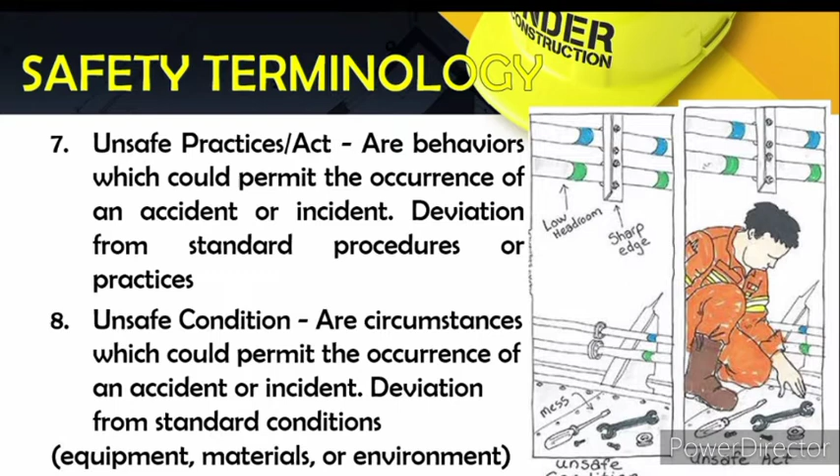So this picture shows the different terms. The rusty lifting gear is the unsafe condition, an example of faulty equipment. And the two workers with no PPE and very inattentive to their environment represent the unsafe acts.

So in the third box we can see a near miss, which is the two of them almost being harmed - there is no harm done to them. And the last box is what we consider an accident because it is fatal, not just an injury. So both near miss and accidents are called incidents.

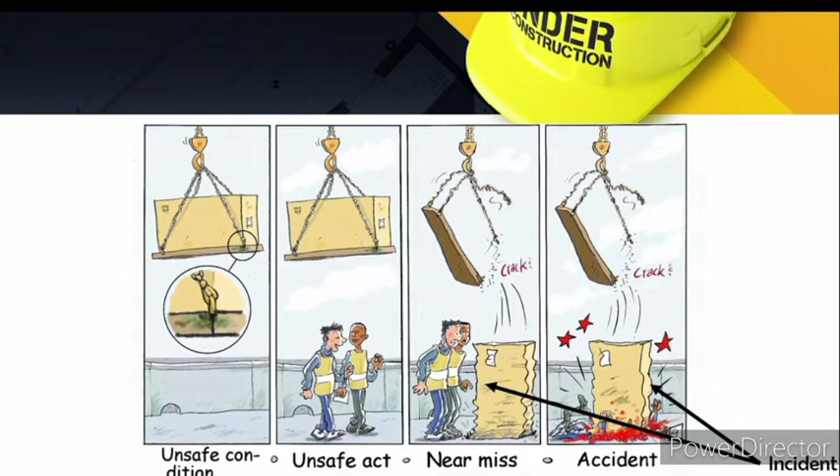Number 9 is safety programs. These are activities designed to assist management and employees in the recognition, evaluation, and control of workplace hazards. The main goal of safety and health programs is to prevent work-related injuries, illnesses, and deaths.

This is a very important aspect in the workplace. Safety programs are activities that help employers and employees control workplace hazards. This may include training on how to identify and control hazards, conducting inspections, or implementing a reporting system - all to maintain safety in the workplace.

Number 10 is the safety audit. A safety audit is a critical examination of a safety and health management program to determine its effectiveness and compliance to regulatory standards. Safety audits are carried out to assess health and safety processes on construction sites.

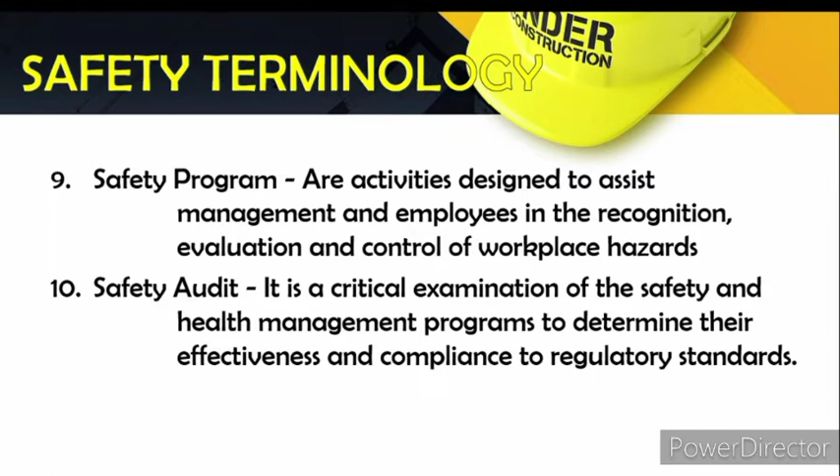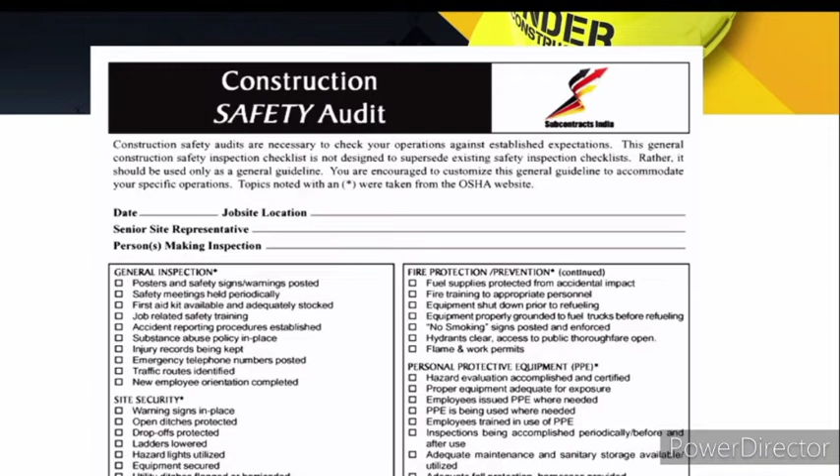This picture is an example of a construction safety audit. As you can see, there is general inspection, site security, PPE, fire protection and prevention, and many more categories that follow. These are used to check and assess different aspects of a workplace to ensure safety.

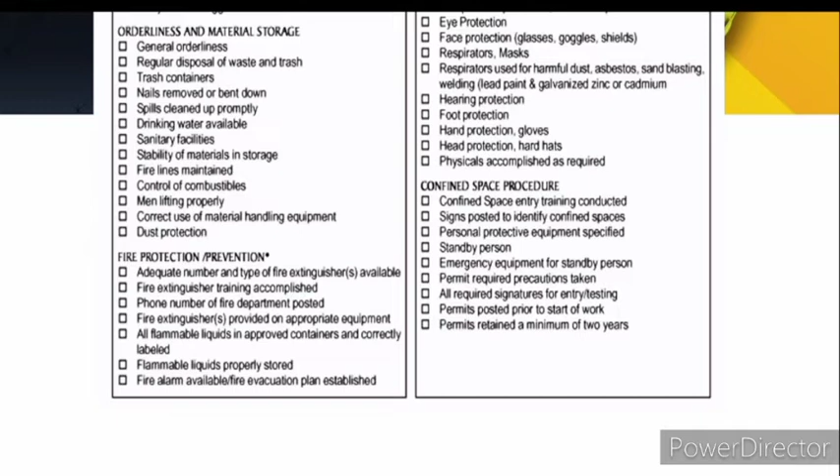The last one is personal protective equipment, or PPE. These are devices used to protect an employee from injury or illness resulting from contact with chemical, radiological, physical, electrical, mechanical, or other workplace hazards.

First is the hard hat - never enter a site without this. This protects the head from any danger, from bumps to the head, sharp edges, objects falling from above, or accidental contact with electrical hazards.

So, construction sites are prone to noise hazards. That's why we need to wear ear muffs. Ear muffs and earplugs are common hearing protection tools. Ear muffs are used for reducing high-frequency noise, while earplugs are effective in reducing low-frequency noise.

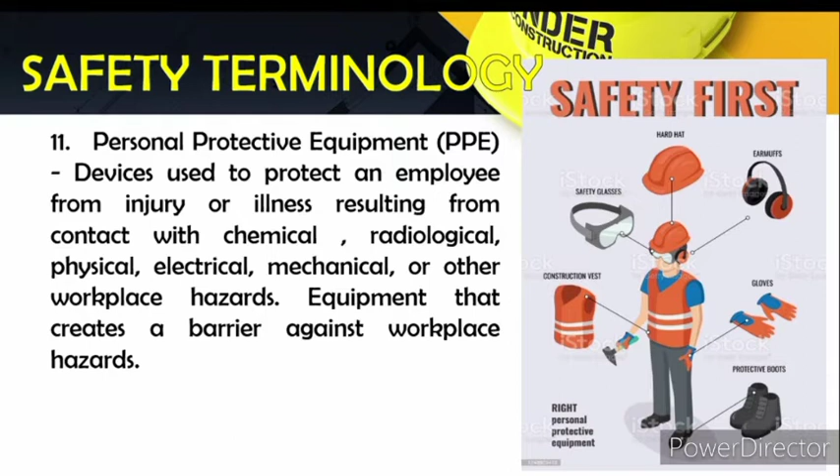Last one is the construction vest. So why do we need to wear a vest? One importance of the vest is for easy detection, which can help other parties avoid colliding with the individual because it promotes visibility. So there are many more PPE and it will be discussed later on.

So let's move on to the facts and figures from OSH in the construction industry. OSH stands for Occupational Safety and Health. So these are the facts and figures from OSH.

17% of the surveyed companies have experienced death in their present workplace. 71% of the workplace do not have a first aid station. 21% of the surveyed companies reported major injuries. 72% of the workplace do not have trained first aid personnel. 17% of the surveyed companies accounted disability. 42% have minor injuries occurring in the surveyed job sites.

10% use their safety belts. 6 out of 10 claim that personal protective equipments were not issued to them, and 2 out of 10 used lifelines.

So what does this figure tell us? It only means that some of the health and safety policies are not properly implemented. Some of the management are lacking and irresponsible to their employees. It is alarming that many construction sites are unsafe and hazardous for their workers. Some safety and health policies should be strictly evaluated and implemented accordingly for a safer workplace.

Working surfaces, machinery, trenching, and scaffolding are constantly moving, being assembled and modified, and new hazards are continually emerging. So kapag dito sa safety problem, makikita natin na sa scaffolding, once na inassemble natin siya, halimbawa hindi na siya kailangan sa first floor, sa third floor naman natin siya i-assemble kasi doon na yung kailangan ng workers natin magtrabaho. Kapag nagkamali tayo ng assemble dito, doon na magsisimula yung another risk para sa ating mga workers. Baka may matapakan sila na hindi maganda ang pagkaka-assemble sa part na yun ng scaffolding, or may mga tornilyo pala na nawala nung inassemble na natin yung scaffolding. Doon mag-emerge yung safety problem.

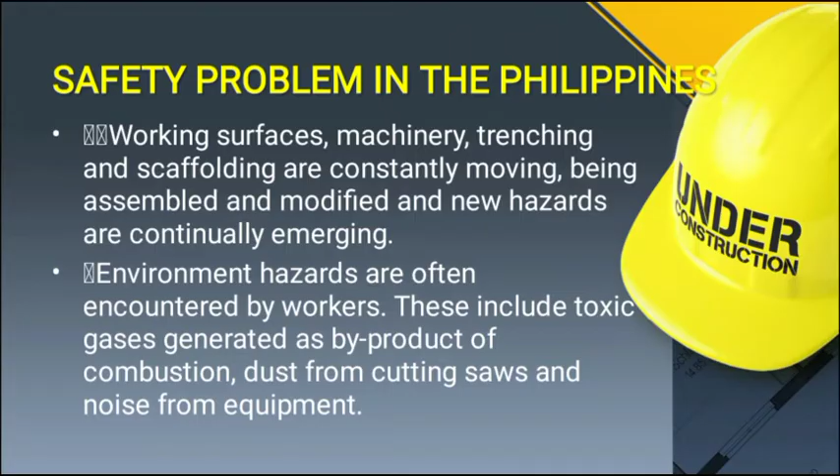The last safety problem is the environmental hazards often encountered by workers. These include toxic gases generated as byproduct of combustion, dust from cutting saws, and noise from equipment. Kaya siya isa sa safety problem na kinakaharap ng ating mga workers, kasi halimbawa sa factory, minsan nadidistract sila ng mga machinery na nasa kanilang paligid. Minsan naman, nalalanghap nila yung mga toxic gases na mula din doon sa mga machine na kanilang ginagamit. Ang tendency is maaari itong makaapekto sa kanilang health, at isa pa, maaring makaapekto rin ito sa kanilang production pagdating doon sa factory na kanilang pinagtatrabahuhan.

Before discussing the predominant items in construction, let us first define the word predominant. When we say predominant, it is being the most noticeable or largest in number. So sa construction industry, ito yung masasabi natin na most common na makikita natin during the construction process.

Unang-unang predominant item natin is the ladder, or yung hagdan. Ano nga ba ang purpose ng hagdan? Ang purpose ng hagdan ay kagaya lang nung purpose kapag nandun tayo sa ating bahay at may ginagamit tayong hagdan para mag-abot ng mga bagay na hindi natin kayang abutin ng kamay lamang natin, o kailangan pa nating umakyat doon sa hagdan para lang maabot natin yung bagay. Ganun din ang kanyang purpose sa construction industry. Ginagamit to help extend our reach, pero meron siyang iba't ibang uri na nakadepende sa purpose ng paggagamitan. Then the next one is the scaffolds.

Scaffolds is used as temporary platform used to elevate and support workers and materials during the construction, repair, or cleaning of structure or machine. Yung scaffolds ay karaniwang makikita natin in terms or in form of wood, or pwede rin siyang steel. Pero sa mga malaking building, karaniwan dyan ay steel. Pero sa mga bahay-bahay, makikita na lang natin na scaffold na gamit nila ay kahoy. Then, ang most common type daw ng scaffold ay yung tinatawag nating supported scaffolding.

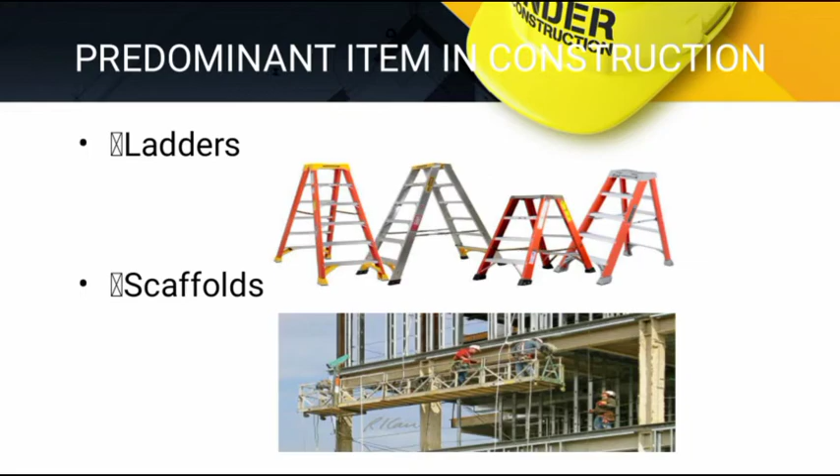Then, the next one is shoring and excavation. Kapag excavation and shoring, ito yung naghuhukay tayo sa ilalim o naghuhukay tayo ng lupa para makapagawa tayo ng shoring kung saan magagawa tayo ng support system na magagamit natin para sa prevent ng movement ng ating soil, ng underground utilities, ng roadways, o ng ating mga foundation. Yun yung purpose ng excavation and shoring.

Then, the tunneling. Kapag tunneling, kung mapapansin natin, marami tayong makikita, yung pinakang primary example niya is kapag sa mga kalsada, may mga tunnel sa ilalim. Ganun na rin yung tunneling. Pero dito sa construction, ito naman yung tinatawag nating subset ng underground construction. Kapag sinabi nating tunnel, dug in types of materials varying from soft clay to hard rocks. Bale magbubutas tayo para makagawa tayo ng butas na magagamit natin sa pag-construct ng ating ginagawang building o ng facilities. Halimbawa, yung mga underground tunnel, ganyan, makikita natin yan. Yan yung isa sa mga uri ng tunneling. Pero yung tunneling, kung mapapansin ninyo, ganun din siya sa mga mina. Yung kapag nagmimina, ganun man din ang tunneling.

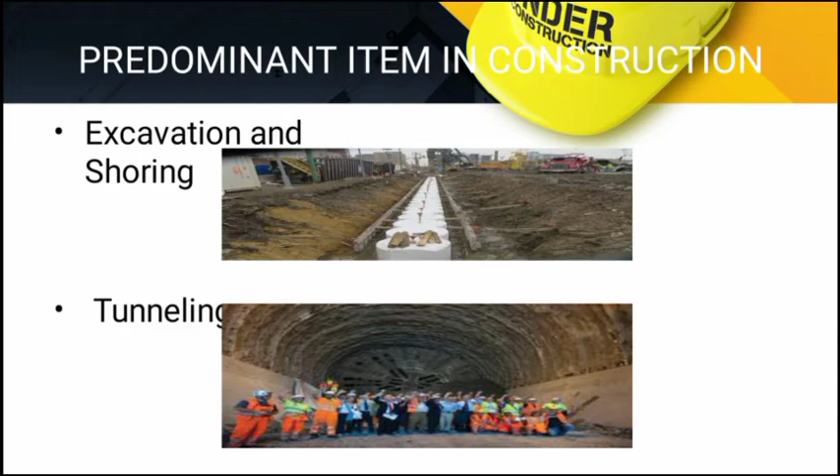Meron din tayong hoist and crane. Ito yung kanyang example. Yan yung ginagamit natin sa pagbuhat ng mga materials na hindi kayang buhatin ng kamay lamang, para mas mabilis nating matransport yung ating mga materials doon sa ating agalagyan. Halimbawa ay sa second floor na ng building, hindi na mabigat siya yung material natin. Ginagamit na itong para i-transport yung ating materials na ilalagay.

Then when it comes to heavy equipment, ito yung mga ginagamit natin. Karaniwan natin ito makikita dyan sa kalsada. Marami man din ganito dito, yung mga bulldozer, then yung mga pison. Ito yung mga heavy equipment na ginagamit natin para yung mga mabibigat na gawain ay ma-minimize, kumbaga hindi na tayo mahirapan doon sa mga mabibigat na gawain para hindi na natin kinakailangan ng manual labor. So, yung heavy equipment, it helps complete heavy-duty tasks in the easiest way with minimized risk and reduces the need for manual labor.

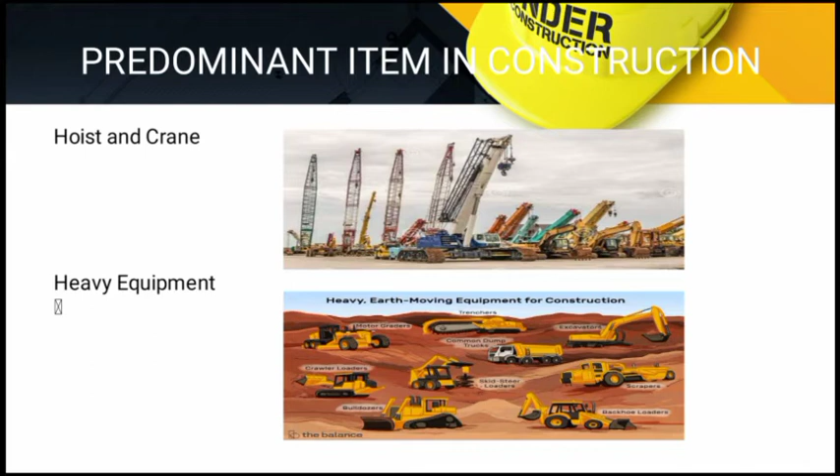Then, the barricades. Yung mga barricades, ito, kagaya nito, yung stop, do not enter, speed limit 30, yan. One way, yung sa makikita natin karaniwan yung parang tao na yun, dalawa yun ay karaniwan natin makikita dyan sa kalsada. Itong mga barricades, ginagamit natin to as warning devices that alert others of the hazards created by construction activities. Yung mga orange na yon, makikita natin kapag inagawa yung kabila ng kalsada, lalagyan yon para ibig sabihin bawal siyang daanan. Or meron ding mga nakalagay minsan na yung daan daw ay mag-slow daw sa pagtakbo ng sasakyan kasi nga on process yung paggawa ng kalsada. May mga ganun yon, siya yung ginagamit natin as warning devices.

Then, meron din tayong blasting. Ano nga ba yung blasting? Yung blasting ay yung process kung saan ikakrack natin yung mga rock materials para maging, using small amount ng explosive substance. Ginagamitan natin siya ng explosive substance para yung mga malalaking particles kagaya ng rock materials ay mapino natin or ma-destroy natin siya into several pieces.

Meron din tayong formworks. Kapag formworks, parang ito yung kasamahan na siya ng scaffolding. Siya ay associated sa concrete structure surface finishing. Ang formworks, ang kanyang purpose is to provide excellent structural safety by offering solutions against all overlay loads, producing exceptionally safe and practical structures.

Then, the last predominant item in construction is the public protection. Ito yung mga public protection, yung makikita natin na nag-act as warning ulit para alam natin na may danger. Kagaya ng danger, electrical hazard. O makikita natin yan ay sa may mga malapit dun, makikita natin to dun sa mga lugar na bawal natin puntahan kasi nga danger dun ay yung electricity, yung malalaking voltahe, ganyan.

Then, meron din tayo ditong warning, toxic hazard. Mga minahan naman to makikita. Yung danger, flammable materials, meron yung nakadikit dun sa, minsan makikita natin sa kalsada, yung sa mga sasakyan na ang laman ata nun is gasolina. Parang ganun yata yun, or hindi ko sure kung ano mismo yung laman. Pero makikita mo sa labas, ang nakalagay nga ay flammable materials. Bawal mo siyang magpalapit kasi nga flammable.

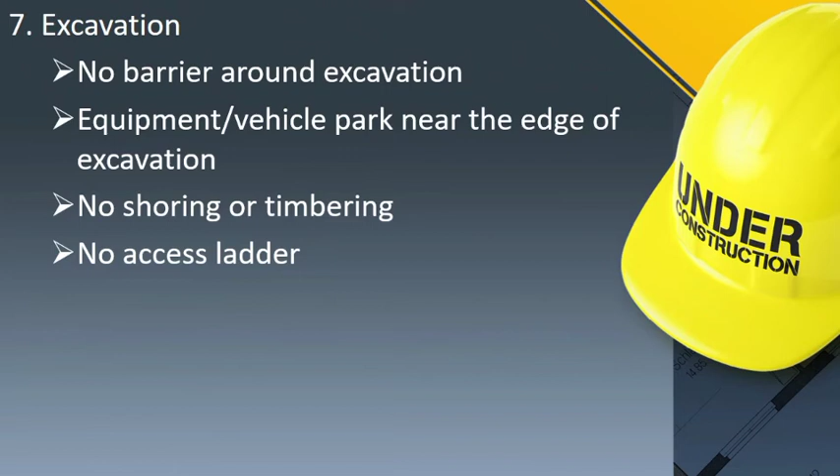Number 8, steelworks. Under nito ay no scaffolds and no safety belts and lifelines. So ang ladder at scaffold or other safe means of access must be provided. Dapat pagdating sa steelworks, laging mag-provide ng scaffolds and safety belts and lifelines para safe tayo. Yun naman talaga ang number 1 priority natin, ang safety.

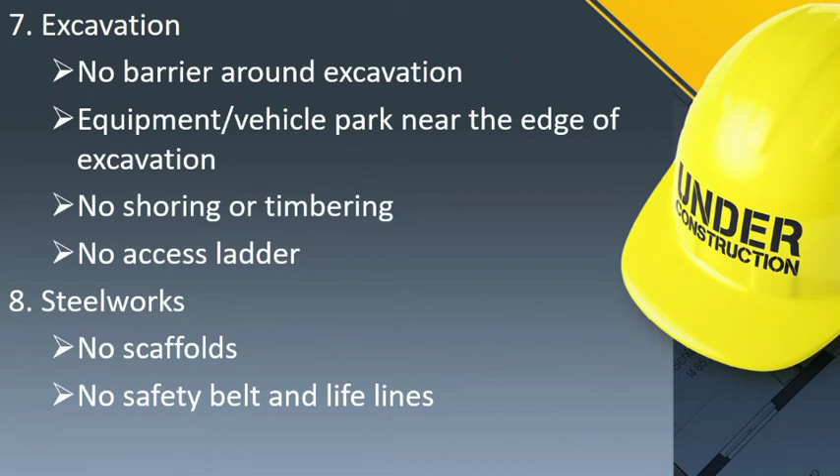Number 9, welding and flame cutting. Under nito ay smoking while working, no fire extinguisher, no goggles or gloves. So basically, PPE pa rin ito. Always wear the correct personal protective equipment, PPE. Protective clothing should be selected to provide protection from radiation, ignition, or electric shock. Clothing should not be able to trap sparks that may ignite the material. Welders should wear eyewear that has UV protection, and they should also use ear protection. Kumbaga, dapat all the time naka-wear tayo ng PPE pag nag-welding o flame cutting tayo kasi alam naman natin kung gaano kadelikado ang pag-welding at flame cutting.

Number 10, woodworking machine. Ang under nito ay improvised machine, no mechanical guards, no push sticks. Use good lighting so that the workpiece, cutting blades, and machine controls can be seen clearly. Position or shade lighting sources so they do not shine in the operator's eye or cause any glare and reflection. Ensure that the floor space around the equipment is sufficient to enable you to machine the size of workpiece being processed safely without bumping into other workers or equipment. So dapat pagdating sa woodworking machine, lagi tayong maging aware.

And ito ang parts ng PPE. Nahati siya into 8 parts: head protection, hearing protection, chaps pants, foot protection, eye protection, high visibility hat, vest pants, hand protection, and harness lanyard.

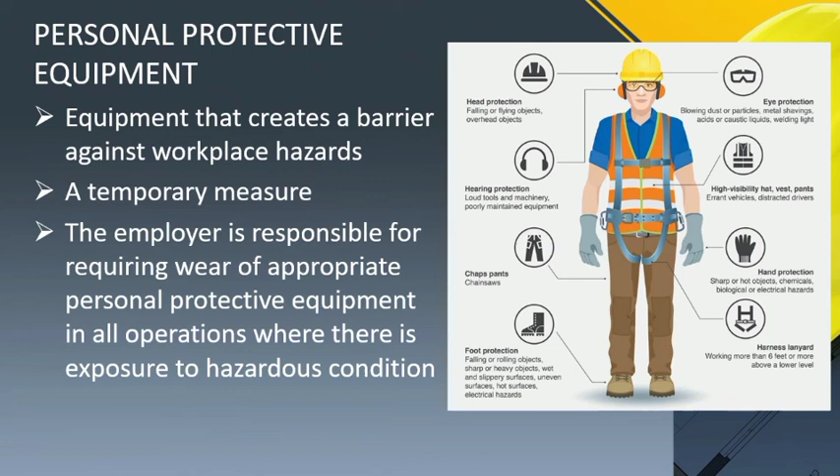Types of the PPE, or parts ng PPE: head protection, eye and face protection, hearing protection, respiratory protection, arm and hand protection, foot and leg protection, and protective clothing.

So, head protection ay employees working in an area where there is a possible danger of head injury from impact or from falling or flying objects or from electrical shocks and burns shall be protected by helmet. So, in other words, ito ay protection para sa ulo na naiwasan natin kung may bagsakan tayo ng mga matitigas na bagay sa ulo, etc.

Eye and face protection. Employees shall be provided with eye and face protection equipment in machines or operations present potential eye or face injury from physical, chemical, or radiation agents. Safety glasses are used to protect the eyes from flying objects. Chemical splash goggles protect against fluid by sealing tightly against the face. And face shields provide highest level of protection.

Kumbaga ito yung pagdating sa pag-welding, kumbaga may mga sparks man din doon na makatama sa mata natin. So ito ang use nito.

Hearing protection. All hearing protection devices should have a noise reduction rating and are equal to the number of decibels they will reduce noise level.